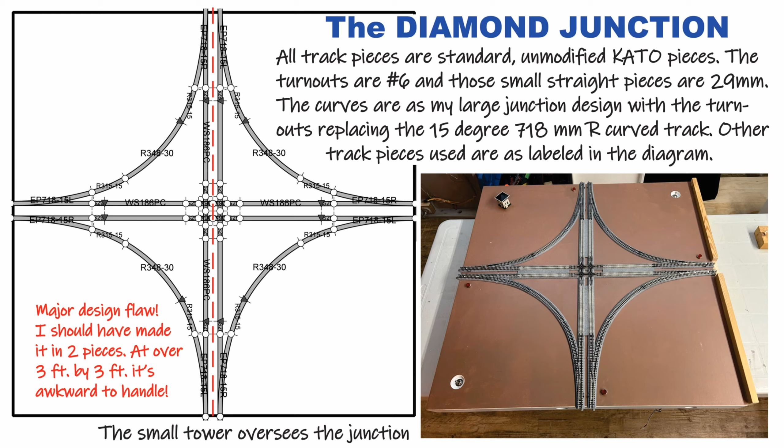Wiring: the green dots at the track joiners are power feeder drops. There are 20 of them, actually. Insulated rail joiners are shown by the black triangles. The tracks were designated red and yellow for future layout wiring reference. Notice all the 3-way extension cords. All power leads are connected together with only one plug out for normal layout inclusion. Everything is all red bus.

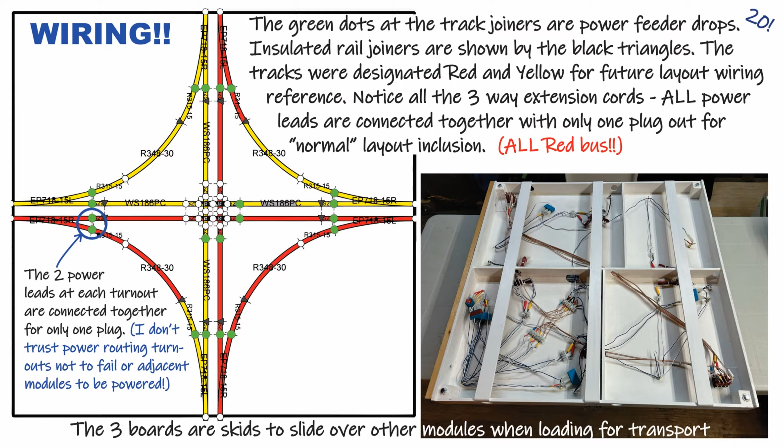The crossing is controlled by 2 4-pole double-throw center-off toggle switches on opposite corners for accessibility. The indicating lights are powered by track power, indicating which through route is off. These can be replaced with more prototypical signal lights at a later time if desired, but they might not be so easy to see.

The removable board is a foot, allowing the module to stand on end without protruding track end damage.

Model railroading can be like watching fish in a tank, trains running around loops, or playing with your dog, operations. At model railroad shows, we often can't do more than run around loops watching fish in a tank, which can be relaxing or free us to do other things. But more complex layouts allow us to play with our dog, operations, that can be similar to role-playing games as we emulate real railroad operations as best we can in our miniature world.

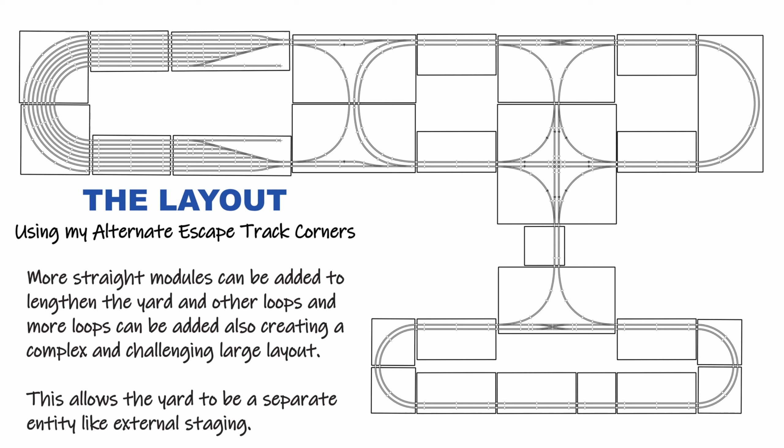The layout using my alternate escape track corners. More straight modules can be added to lengthen the yard and other loops, and more loops can be added also, creating a complex and challenging large layout. This allows the yard to be a separate entity, like external staging.

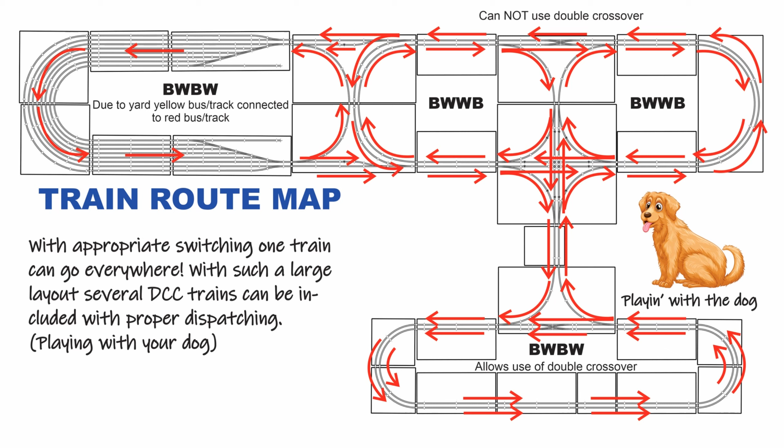The train route map: with appropriate switching, one train can go everywhere. With such a large layout, several DCC trains can be included with proper dispatching. 6 loops are available for individual trains that don't want to interact with the possibilities of the entire layout.

The red loop always has the option of entering the yard or not. The pink loop has the option of leaving the yard and entering the red loop or not. The red loop can absorb the bottom brown loop. The green and blue loops can become one blue loop.

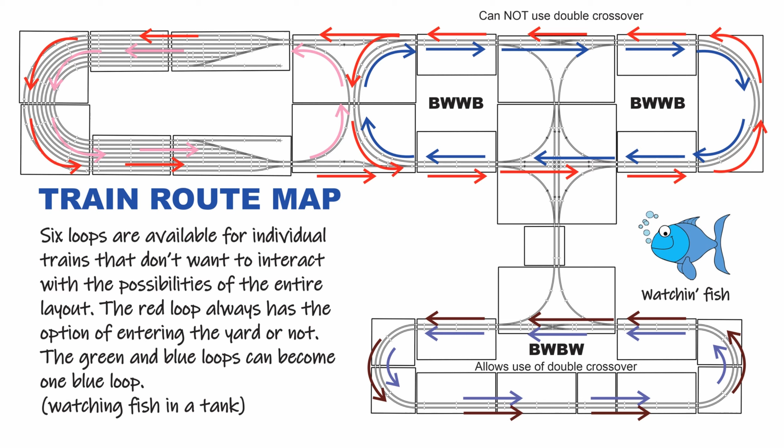This is the reason for the diamond junction concept: to create an interface between 4 separate layouts of 4 independent displayers, allowing them to showcase their own group or club and have the option of operating trains on their home display or travel the world provided by their fellow T-TRAKers.

The outer loops of all branches, the diamond junction, and the single rows of modules of the spines that join them all are supplied by the red bus. All branch inner loops would be on their own yellow bus and use the electrical supply of choice.

Dead rail protection may not prevent crashes. Depending on the length of the dead rail zone, automatic or manual protection may not be enough.

As an oncoming train approaches the diamond with dead rail protection protecting the occupied crossing, the front loco bridges the insulated rail joiner, energizing the dead rail, keeping the front loco powered. As the train continues to move forward, the front loco is unpowered as it no longer bridges the gap.

The second loco continues to push, and then it bridges the insulated rail joiner, energizing the dead rail, powering the front loco, and both continue moving the train forward until the second loco no longer bridges the gap, de-energizing the dead rail zone.

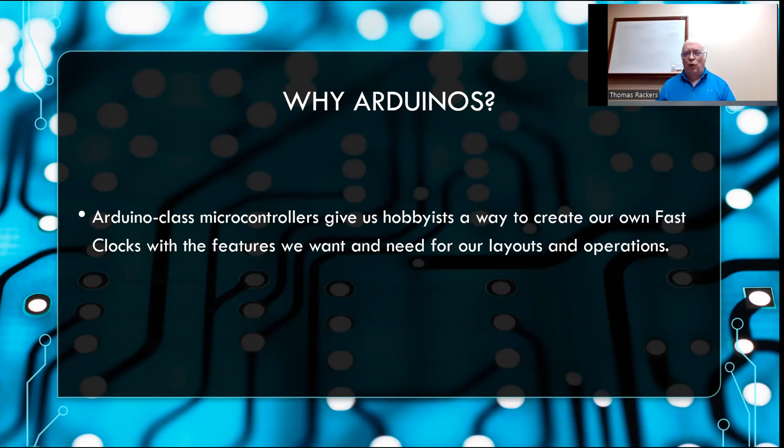Okay, now why Arduinos? Because you can get them, and I've got 4 or 5 of them sitting on the table with me right now, which I'll show you those. But they're easy to, if you have just a little bit of experience, you can start at the hobby level with these, putting them together, making them blink lights, do other things. You can get very sophisticated with a little bit of time, a little bit of work, and a little bit of programming and such. So, okay, who is Arduino?

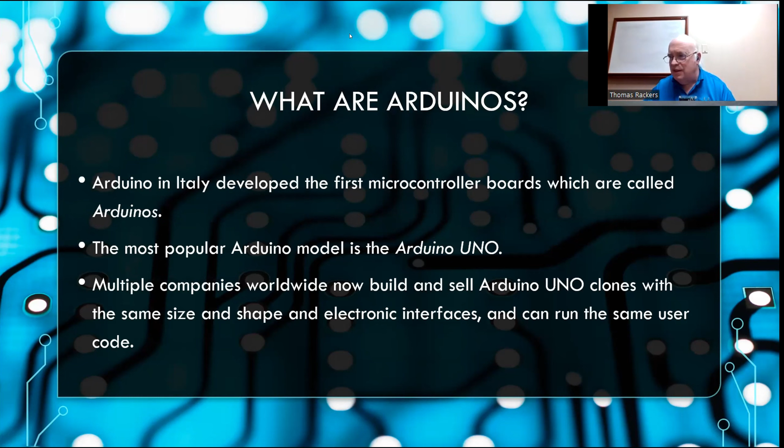Oh, you can't see that. I have to momentarily unshare the screen. Okay, gotta switch to the camera.

So let me share the screen again. Here we go, next time I hit the share button. Okay, so now, Arduino were the first ones to come out, but it was made open source. So there are a lot of other companies who have built their own cards that are basically the same shape, the same interface and such.

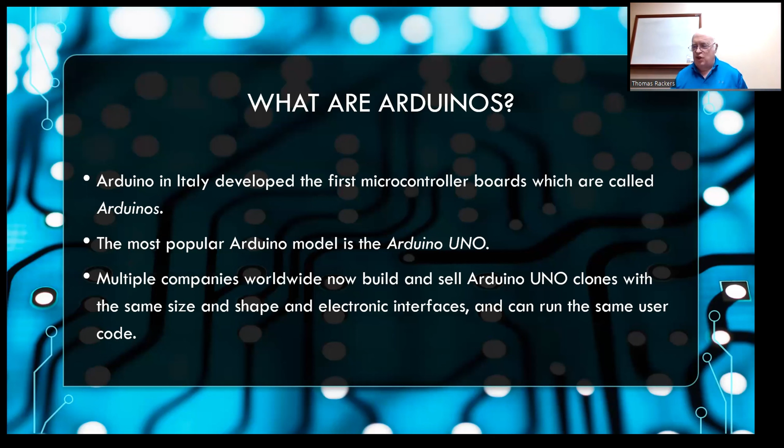Some of them will run the exact same code, sometimes with very slight changes. There are also a lot of Arduino compatible processors. They're not the same size or shape, but they'll still run the same code, just more compact.

These are very handy if you're doing something model railroad related, like putting them inside buildings where you're going to animate lights, or if you can put them in T-TRAK modules to operate a turntable, which is one of my projects. You could put them in handheld devices, like maybe your own custom DCC controller.

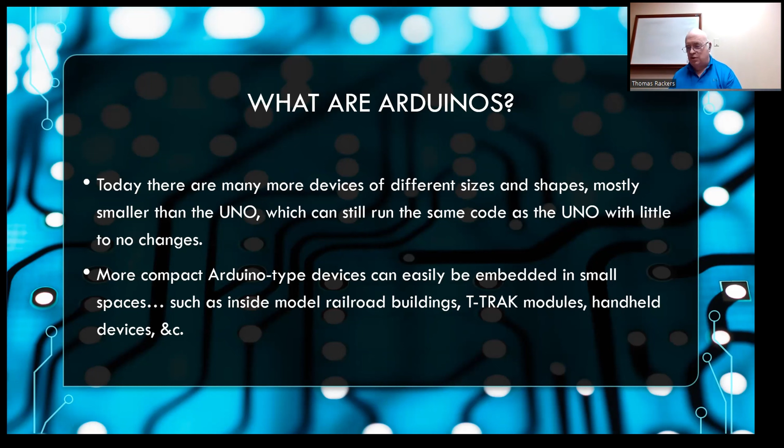How am I doing on time? It's so far 2 hours and 4 minutes.

Now what do you need to do? How do you make a fast clock? The things you've got to have: a piece of code that can step the minutes and roll over on the hour, and after 24 hours, roll that over too. We'll see that in a bit.

You have to have some sort of time base that advances the minutes and hours at some rate you want. It doesn't have to be really precise, unless you're really nitpicky or obsessive compulsive like I sometimes get, but you need something to advance time on a regular basis.

And then to be useful, you need to either display this time in some way for the people, so now you have a fast clock you can see, or trigger something happening around the layout, like when the sun sets, the lighthouse over in the corner turns on or such. Or you can do both.

What might you want to add also? You might want to have some buttons or switches so you can set the starting time. If you're going to do operations, we're going to start at 6 a.m. in fast time. You might want to be able to start, stop, reset the clock. You might want to adjust the speed of the fast clock.

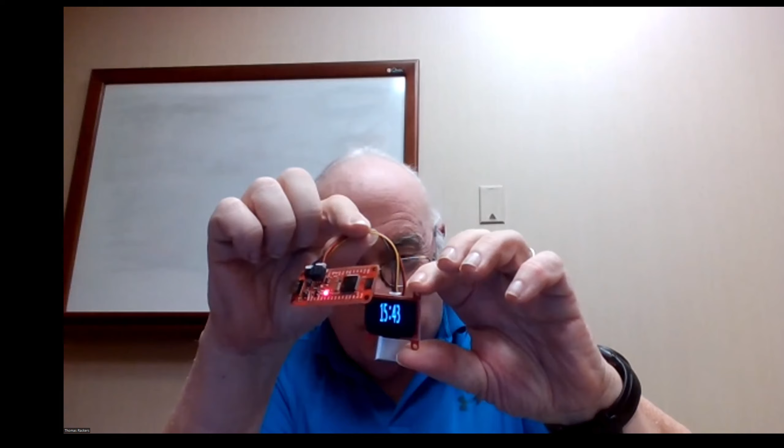smaller Arduinos. This is an Arduino compatible processor here, running on a battery, and this is our display. This has been running for a while, since I got here. It's a very tiny screen with very tiny characters, which unfortunately can only show 4 characters at a time, and the colon counts as a 5th one. But it's still showing the fast time since I powered this one up.

You could use a little bit better processor using, say—switching cables here real quick. I have one USB cable too few. Yep, there we go.

Okay, this is another type of Arduino compatible processor. Sorry, it's in this hand—get in front of the camera. There it goes, and this is the display it's driving. A little bit bigger.

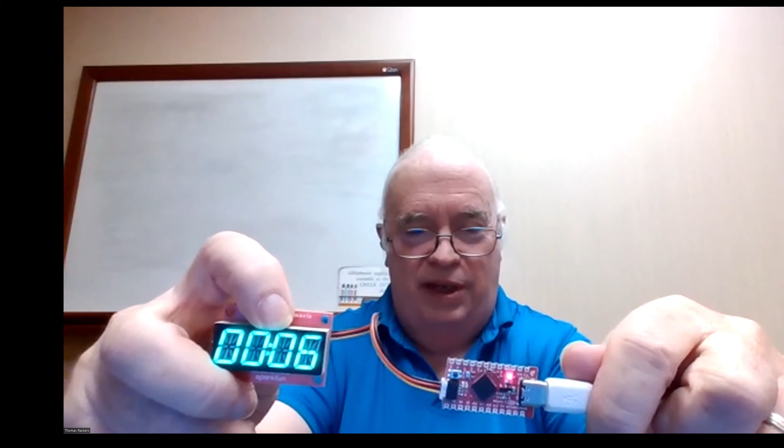Okay, this one is made by a company called SparkFun in Colorado. The one I'm going to show you next is made by a company in New York called Adafruit. And this is the one that you saw a bit earlier. Okay, so it's going to start over at 0 again.

So this is the processor, the little board here, and—oops, got it upside down—a much bigger, useful display. This would be big enough you could put it in a room. You should be able to see it from across the room, as long as it's not a warehouse or something like that.

So all of these are running the same code, and it's another code that's on my GitHub. It's just called Fast Clock, and by changing just one of three lines, you can have it drive this display, that display, or the other display. The timing is the same—only the code that knows how to talk to this type or that type of display changes. So that's the kind of thing you'd have to customize for your setup, but it's not difficult.

Okay, I'm going to go back to my shared screen.

Looks like we're just about there. A couple more minutes, maybe, Thomas.

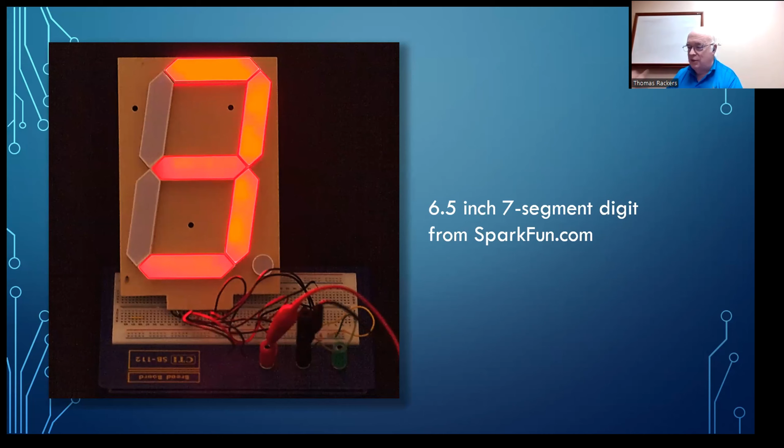Okay, I'll try. This is the importance... this stuff will go quick. If you really get excited, you could go to SparkFun. They've got digits you can buy, 6 inches tall, but at $30 per digit including the electronic part, I wasn't about to go buy examples.

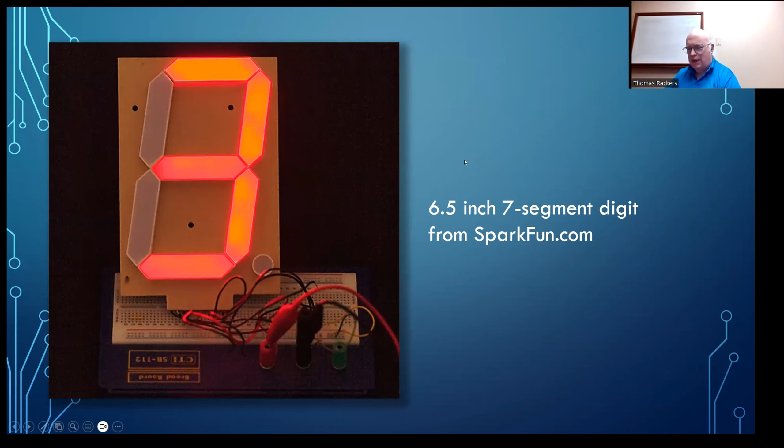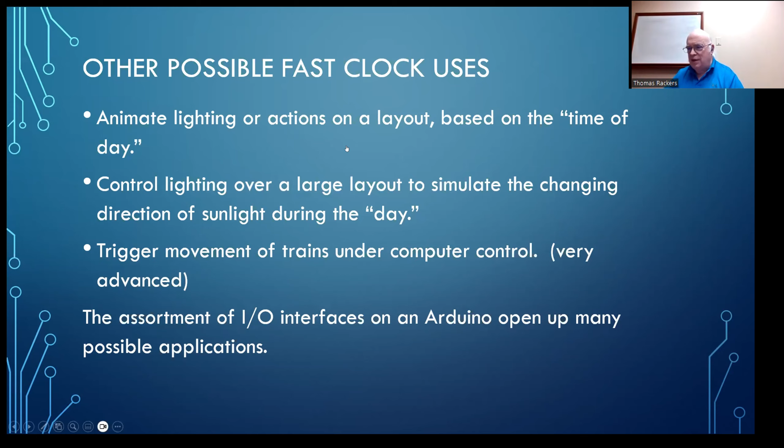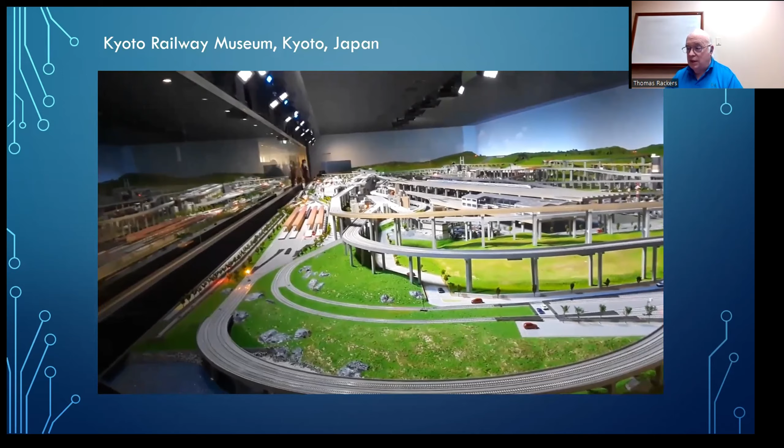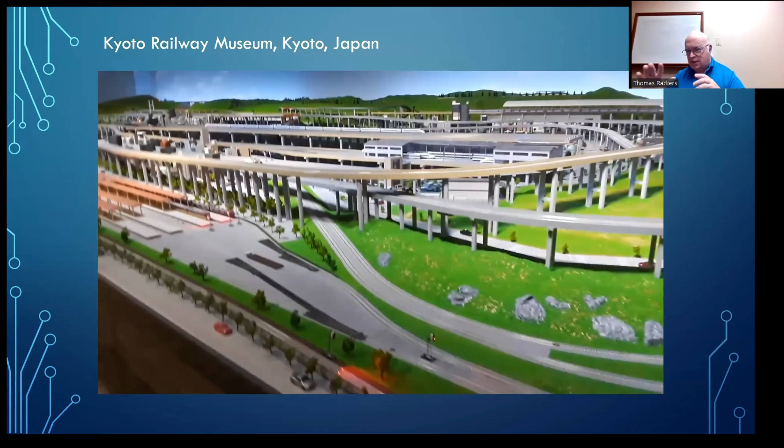This is an example of that. This one is in the Kyoto Railway Museum in Japan, and it's a huge N-scale layout. It's actually not animated, but the interesting thing is the ceiling lights are under control, and they do a 20-minute presentation where the lights come up like the sun is rising, and things power up and start running around. By the end of the 20-minute presentation, the sun's already set and such.

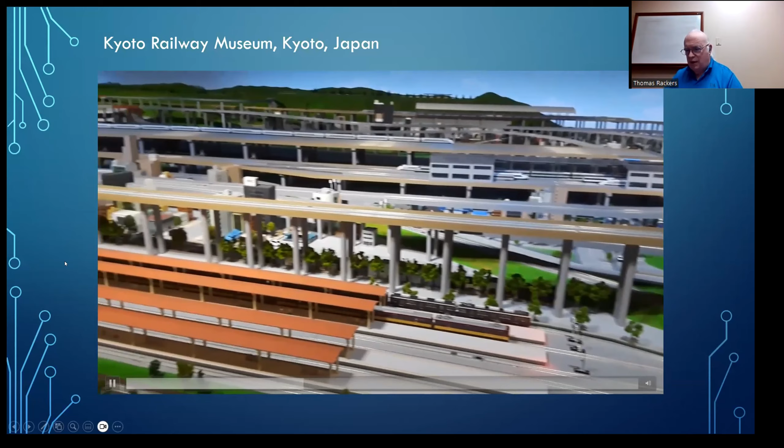Now, that's just for people who like seeing control panels. This is not computerized, this is all manual, but just for fun.

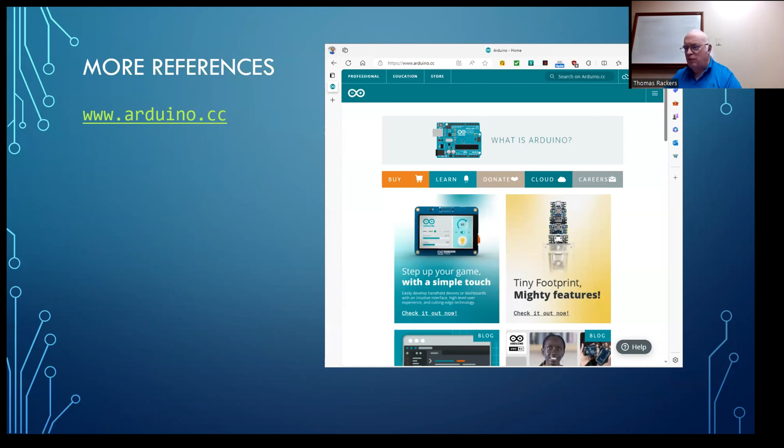Okay, now some real quick references. If you want more information, Arduino has their website. Adafruit has theirs, SparkFun as well. There's Arduino groups.io, model railroad related electronics and programming discussions - I just learned about that in the past week. Facebook also has a group, Arduino for model railroading.

Arduino Days happens about once a year, and that's coming up March 21st to 23rd. I've actually got an event I'm going to be putting on at this very library where I'm sitting right now - we'll worry about that later. And then, shameless plug, my blog, which you can get to at modelrailroadelectronics.blog. There's way too much information on there because I don't know when to shut up, which I'm probably coming up on right now. And that was it.

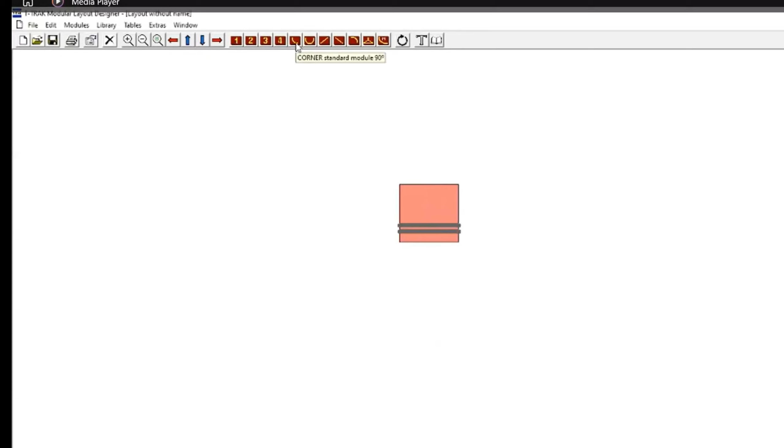And I've shown you the basic buttons we've got on the top. Let's do a basic, simple layout. So I'm going to do the original layout that I built back about 20 years ago. I had a single, which I got by clicking on the one, and then I'm going to put two corners next to it. So I just clicked the two corner modules, another single, and then an end cap — that's the basic layout that I started with.

So what I can do now is customize some of these modules to represent a bit more of reality. So one of these modules, I'll click it there and select the properties — edit properties, or you can select this properties button. I'll see that it's a type single straight and it's got a name, and in my actual module it's called Peaceful Crossing. So I can show that here.

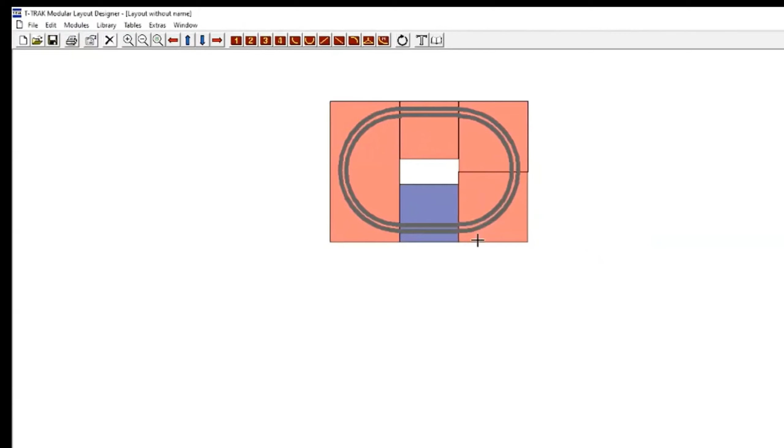I've renamed it, which is great, but it doesn't really mean much. So let me select it again, do the properties again — I want to label it. To do that, you add a hashtag, #, to the front of that label. So when I do that and deselect it now, I can see that it's labeled Peaceful Crossing. Let me select it again.

The other feature I wanted to highlight is over on the right-hand corner here, the track feeders and DCC panels. In my case, Peaceful Crossing actually has a DCC panel, so if I click that, it'll update the interface to highlight that it's got a DCC panel there, giving me a visual indicator on that module. Similar to this module on the other side, it actually has power drops — that was my single power drops in the original module.

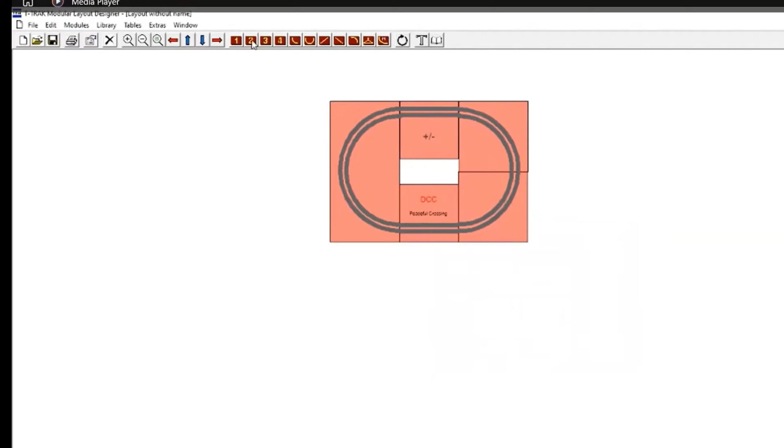So I can click my properties button, add the track feeders, and you'll see the plus/minus sign. Now I've got this one labeled, this one indicating it's got a DCC panel on it, and this one indicating it's got power drops. So this is the basic layout. What I can do now is select all of these modules, and if I want to move them, I'll right click — whatever module you right click from becomes kind of the anchor for that.

So I'm going to right click on this end loop, and now I can see where the end loop is going to end up. So I can drop it over there. And then I could do Control D to unselect. You can see that up here too. Select all and unselect. But Control D is handy when you have multiple selections, just to clear it all out. So I can move that.

The next thing I want to show is how to indicate who the module owners are. So what I want to do is go to extras and append a participant. There's the color that I'm using. If I wanted to change colors, I could click it and pick any of the other colors, but this one's fine because it's the color that happens to be the modules I have now.

I'm going to indicate that these modules belong to Steve J. So what happens is it drops that box in there, and it says 5, indicating I have 5 modules that are mine. Since this is my whole layout, it's obvious, but it's a way to show that. For larger, more complex layouts, it's really a handy feature. You could do it by individual, or if you have a multi-club layout, you could have them by club, so each club knows what modules are theirs.

So what I can also do is use the color I mentioned to indicate who owns which module. If I select this corner module, go back to properties, go to color, and select this green color, say OK, and OK again, Control D to deselect everything. Now I'll see that one's green. And this number went down to 4, because now it sees I've got 4 modules and this other one is somebody else's.

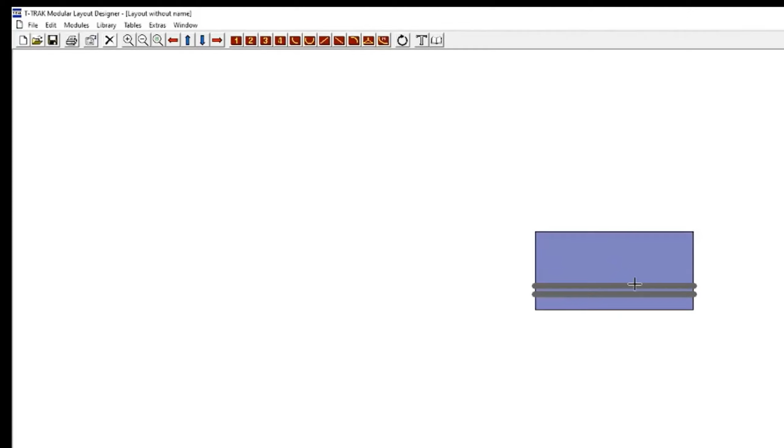So inside of that, the first thing I'll do is click that file to select it, open up the properties, and go to tracks. Right now you'll see there's two sections that represent the front track and the back track, at 48 millimeters from the front and then 81. So what I do is I want to add a new section.

So I'm going to append a section - that's the third one. Now you see there's 3, but there are no nodes on it yet. So what I want to do is add the points that represent that track. Let's append a node. The first one I'll say starts at 62 millimeters from the left, which is the end of a standard 62 millimeter track section, and it'll start at 81 - where that back track is located now.

And then what I'm going to do is add 5 nodes, for a trick that I've learned, and I want to show you that. So 1, 2, 3, 4, 5. And then I'm going to add one more to represent the left edge of the straight track that I want to include in there. So I'll double click that.

And for the X location, let's do 248. And for the Y, 114, which is 33 on top of the 81 that was already there - so that's 33 millimeters behind that track.

And then one more node to represent the right end of it. I'm going to go ahead and take that all the way to the end of the module, just in case I want to represent it connecting to another module at some point. So we'll call the X 620, and the Y 114.

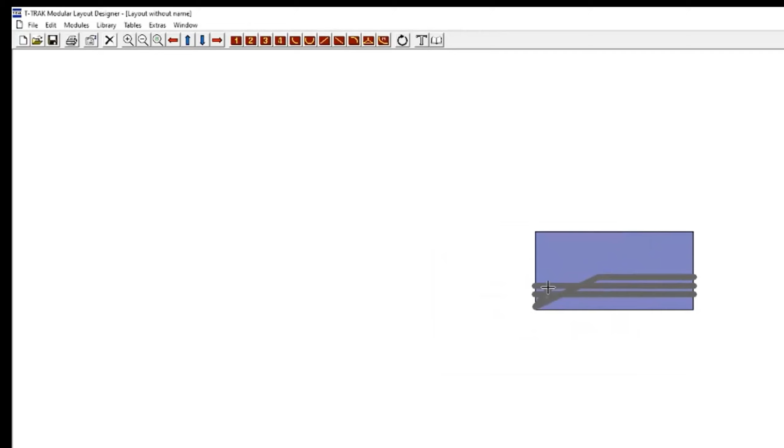So now that we've got that set, we'll click OK, and you're going to see I've got a track now that starts there towards the end. It ends up having a straight section here, but there's a whole bunch of points down here in the corner - those are related to this trick. So I could do the math and have gotten the exact XY locations for every point along these 2 curves, but I don't need to. So why go through that hassle?

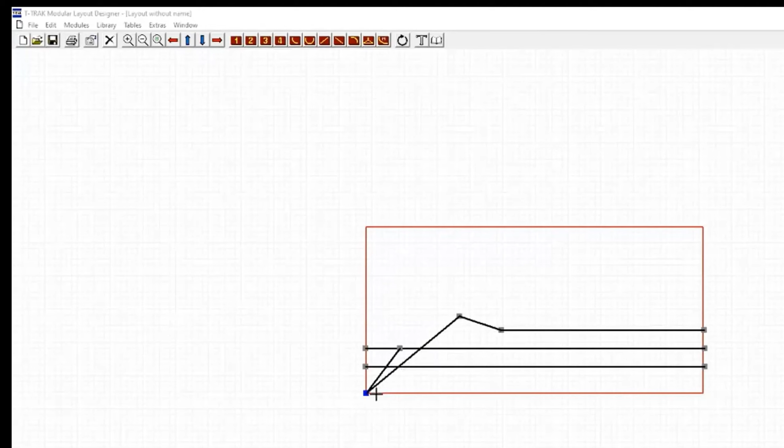There's a really cool feature - if I go back to the tracks, select section 3, and do modify position. When I do that, it has all these points at 0,0 down here, and I can do a visual update. So what I'm going to do is just start clicking points and moving them out, just so I can get them out of that corner and then start to figure out what I'm working with.

All right, so this is the middle one of those fifths, so I'll just kind of put that with the 5. I'll put that sort of in the middle there. And then I'll add these 2 here and move these 2 kind of here, representing a bit of a more gradual curve than what we had before.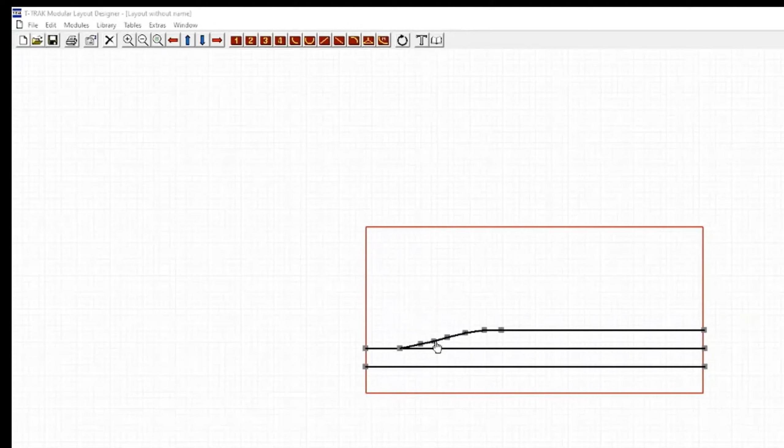And sometimes, like now, I've got all these things bunched up so that they're difficult. You can also just quit that, bring them back, try all over again. When they get too close to the same position, it's difficult to adjust their location. But there we go, so that's your siding.

So now if I push the escape key, I get back out of that. OK, and boom, now I have a module that has that spur track right next to the two inside tracks. Now I can save this as a TRK file. I'm going to save as Steve J double with siding and say OK, yes, I want to replace it. So now I have this module saved all by itself. What I did is I saved it with my name in front and the descriptor.

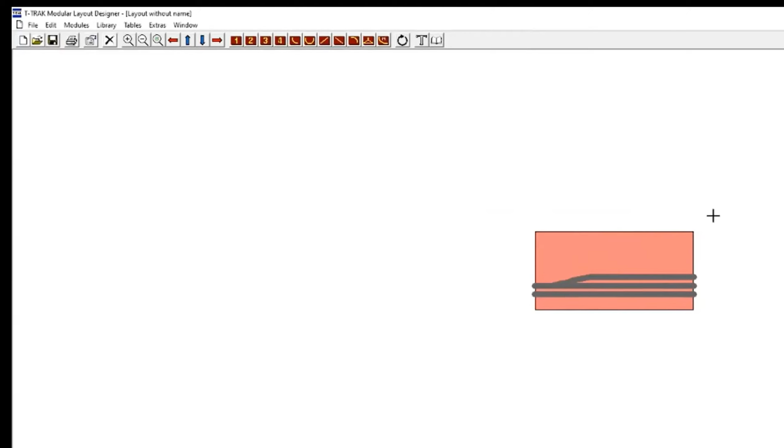Sometimes I'll use the names. These are now like a template that I can use. So if I close this particular layout file, it bounces off to this other layout file that I had a minute ago, where I had the original layout that I built. I want to add that double to this layout, so I'm going to first off move these two corners out of the way.

And then I'm going to take this module, rotate it, and relocate it up here. Again, I'll use the shift or the control key, whichever one makes it work right, to put it there. I want to put that double here opposite these two singles that I have in there. So now what I can do is go to library, append modules to the layout. I'm going to select that Steve J double with siding file, and boom, there it is.

So now I'm going to select that, right click, move it over here, control or shift, whichever one works, and drop it into place. Now what I want to do is move these two modules back, so I click on those two, control or shift, whichever one works, try to match those up. And now I have this layout with that double module that I just created in here because I brought that in as a template.

Now I can save this whole layout in order to save it off for later. So if I'm doing a particular train show, I can save it with the date file or something like that. So now I can do save. File, save as, and I'm going to save this as my test layout TRK, so I'll replace the file that was already there. Now I've got this file that I've saved and I can open up and reuse over and over again.

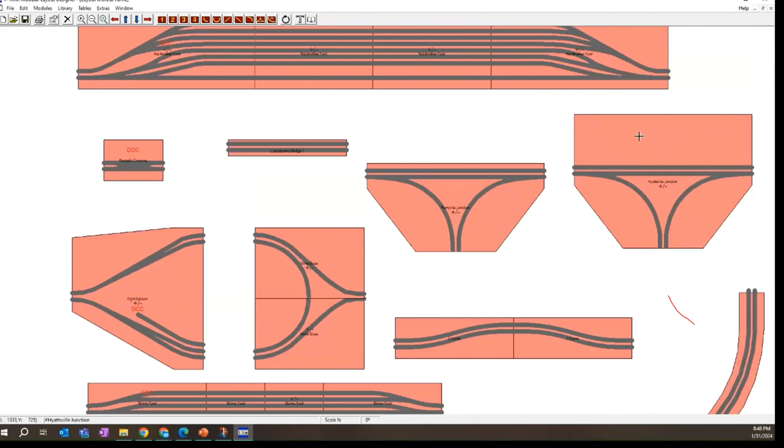We've got these two junctions that are based on triples that come out, so you can go straight through or pull out through there. We've got one of them that is deeper than the other, so again, to make sure I understand when I'm putting that in the layout what that would look like. Super skinny bridge, standard single with a double crossover on it.

And then I'm using that down arrow, up arrow here, but then there's this big yard that we have. This is a triple, two doubles, and another triple, so a 10x equivalent yard. So we could build some pretty complex custom modules and then just use that library append feature in order to bring those in.

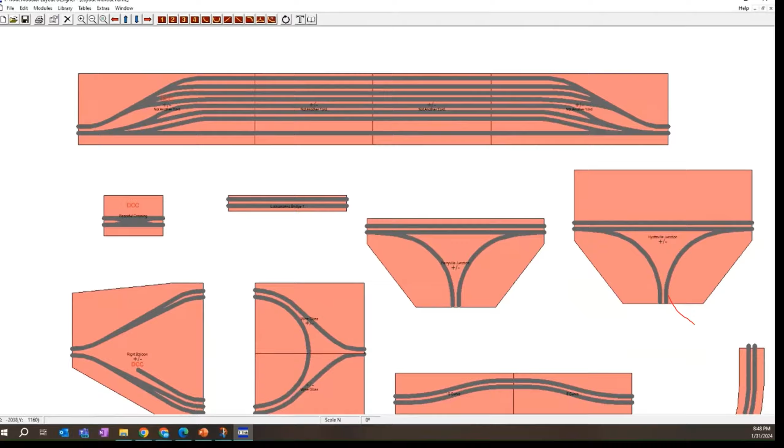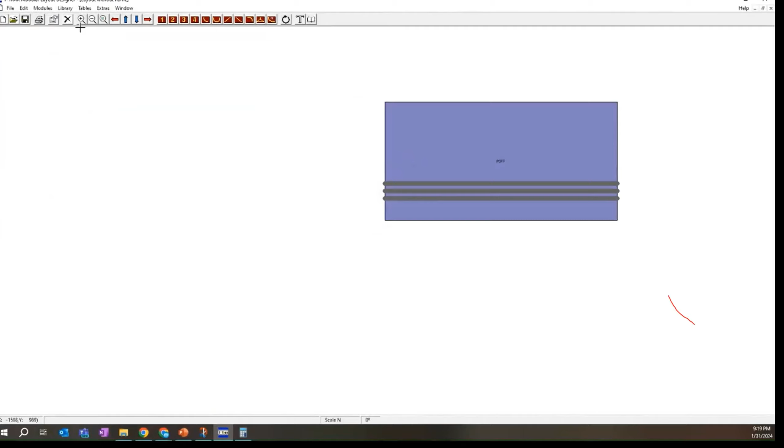I promised that it was also applicable to other module formats, so I have built TRK files for NTRaK modules as well. I can append an NTRaK POF, what my club calls them - it's a plain old 4-footer. I also can import a 3-foot corner that I have here as well, so you can get a sense for kind of how these work.

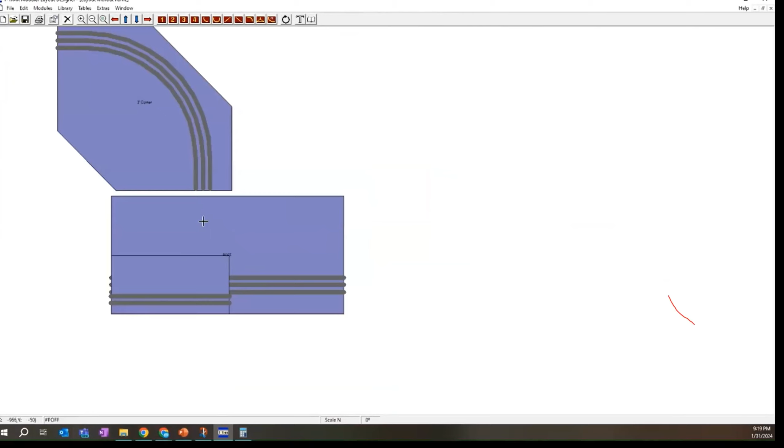So there's a double, so clearly these things are bigger, right? These are scale representations of the different module formats. Let me get rid of that T-TRAK module, push the delete key. And then what I can do is start to move these around a little bit, so let me bring in some additional corner module.

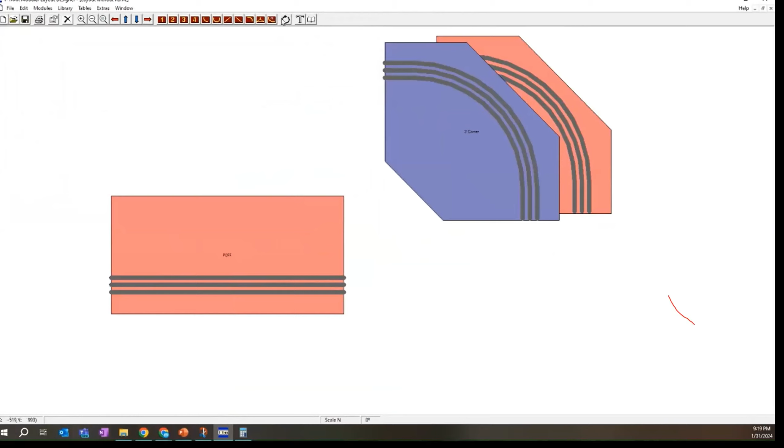So select the one I want, let's go ahead and rotate that around. And then I'll right click it and just look at trying to lock it in. In this case, I can't get the control and shift to lock it in the way I want, but I can actually just sort of visually see it, because it provides that nice outline.

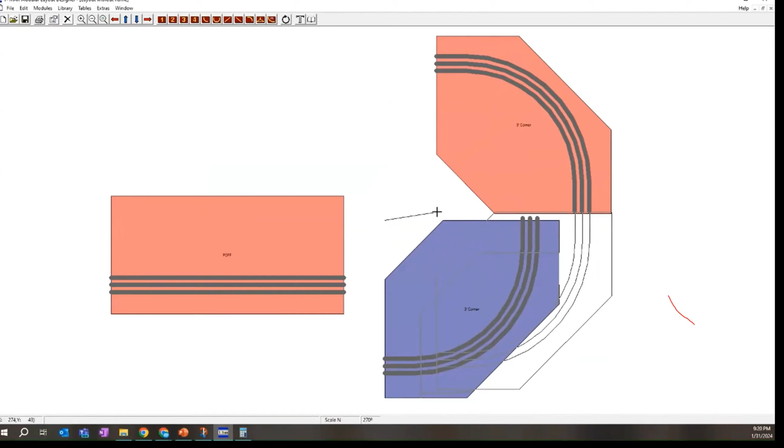That was a new feature in the most recent version. And then I can move this module, we'll see if the shift control works there. So that's the straight module there. And I can continue to add modules, you can see and plan that out as well.